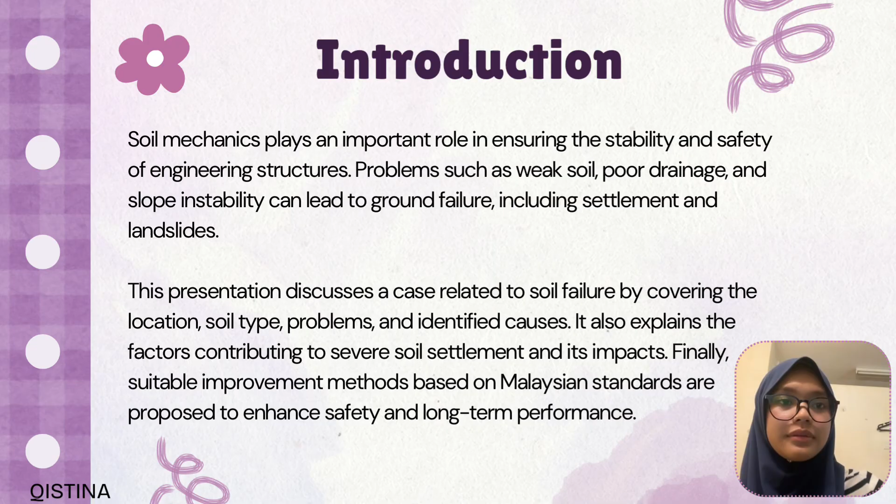Okay, so now I will explain in detail the case that we have chosen, which is the Highland Towers tragedy. About the case, this incident occurred on 11 December 1993 at Taman Hillview, Ulu Klang, Selangor. The Highland Towers consist of 12-story apartment blocks built between 1975 and 1978.

Okay, so what happened? After 10 days of continuous heavy rainfall, Block 1 suddenly collapsed at around 1:30 p.m. The collapse was caused by a major landslide which buried many residents under the debris. As a result, 48 people lost their lives and only 3 survivors were found within the first 24 hours. This tragedy became one of the most significant landslide disasters in Malaysia.

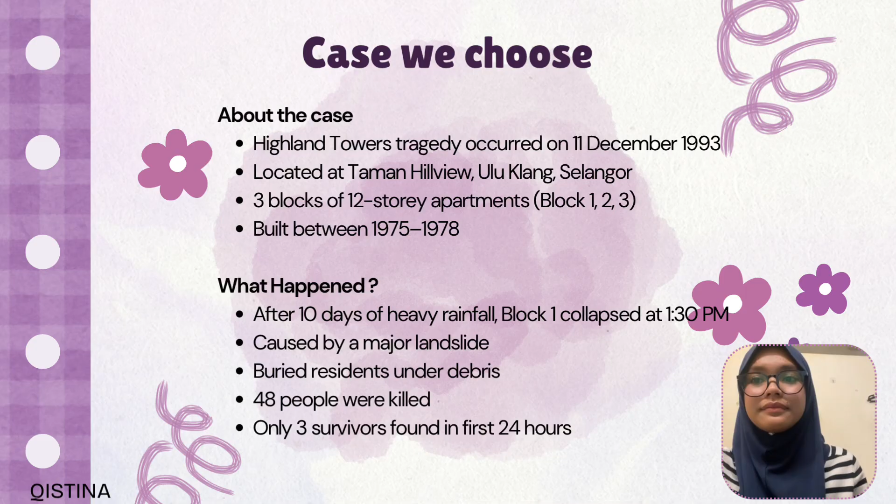This slide provides an overview of the Highland Towers tragedy, which is one of the most significant landslide-related disasters in Malaysia. Starting with the location and year, Highland Towers is situated in Ulu Klang, Selangor. The incident occurred on 11 December 1993, when one block of the apartment suddenly collapsed due to slope failure.

Next, look at the soil type in the area. The site is mainly composed of soft clay soil, which is commonly found in hilly regions. This type of soil has a high ability to retain water, especially during heavy rainfall. When the soil becomes saturated, its shear strength decreases, making it weaker and unable to support loads effectively. So, this condition leads to low stability, increasing the risk of landslide.

Now, moving on to the problems identified. The primary issue was the slope failure or landslide that occurred behind the building. This was mainly caused by excess water accumulation and poor drainage, which increased the pore water pressure in the soil. So, as a result, the soil mass began to move downhill. This movement caused a loss of structural support at the building foundation. Without proper support, the structure could no longer remain stable, leading to the collapse of Block 1.

Before the collapse, there were also warning signs such as cracks in the ground and surrounding structures, which indicated soil instability and differential movement. However, these signs were not effectively addressed in time. In conclusion, the disaster was mainly due to the combination of weak soil condition, high moisture content, poor drainage system, and slope instability, which ultimately led to the tragic collapse.

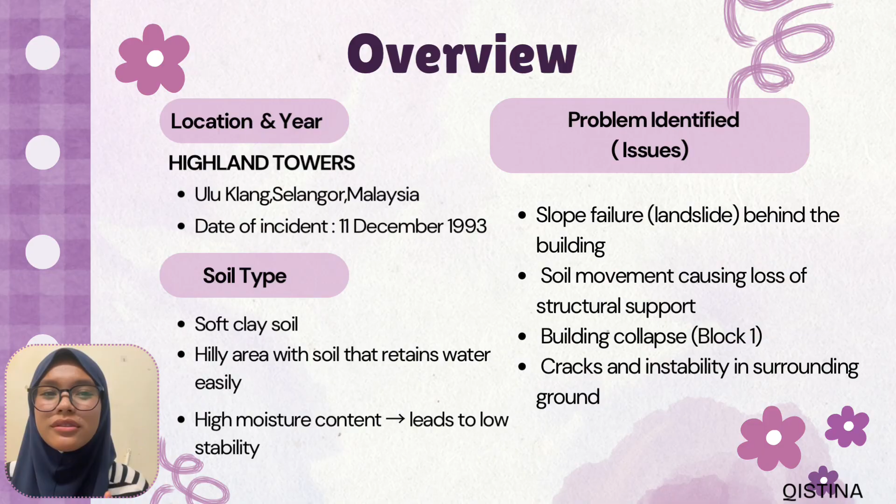Now I will explain the main issues that led to the Highland Towers tragedy. First, we have the landslide trigger. The slope became unstable, causing a mass of soil to move downhill. This indicates that the slope had reached its limit equilibrium, meaning the soil could no longer resist the forces acting on it. As a result, failure occurred and the landslide was initiated.

Next is structural collapse. Due to the ground movement caused by the landslide, the foundation of the building was compromised. When the soil beneath the structure became unstable, it could no longer support the load of the building. This led directly to the collapse of the structure.

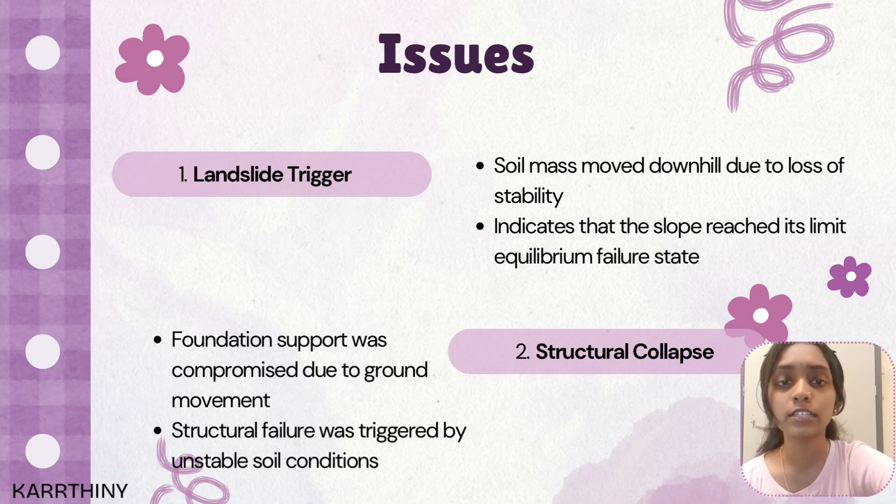Moving on to the settlement. Before and during the failure, there were signs of ground deformation. This includes differential settlement, where parts of the ground sink unevenly.

Water infiltration also weakened the soil layers, causing them to shift and further reduce stability. Finally, we have debris flow impact. After the landslide, soil, water, and debris flowed into the residential area. This caused severe destruction to nearby structures and significantly increased the hazard to the surrounding buildings and residents.

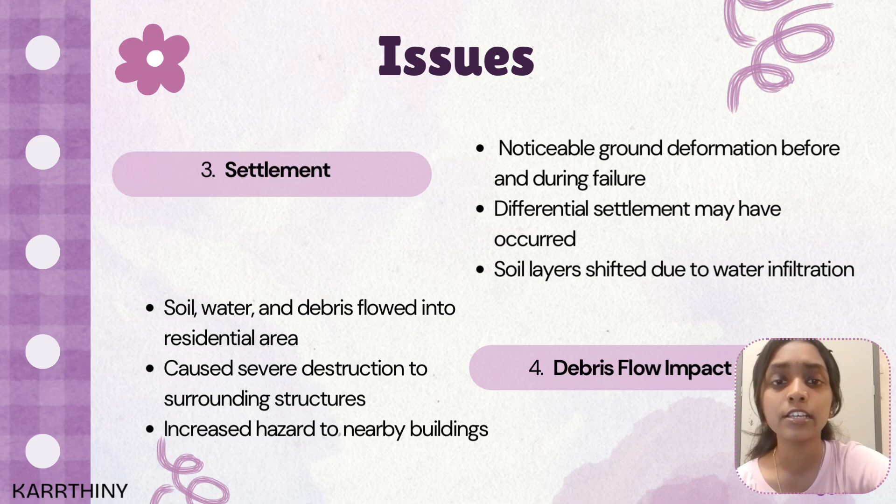In conclusion, these issues are all interconnected, starting from the slope instability leading to foundation failure and ultimately resulting in the catastrophic structural collapse. The slope failure at Highland Towers can be explained by several interacting geotechnical factors. Firstly, prolonged heavy rainfall caused the soil to become fully saturated, which increased the pore pressure and reduced the effective stress. As a result, the shear strength of the soil decreased significantly, making the slope more vulnerable to failure.

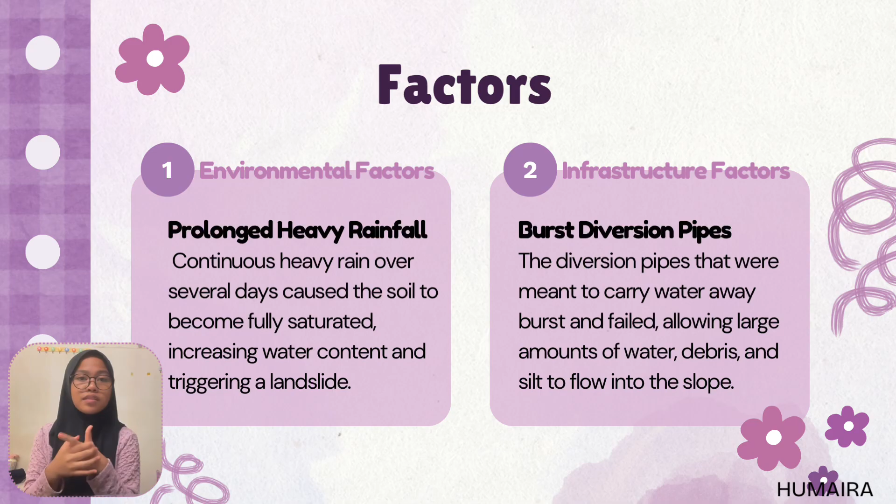The situation was further aggravated by the failure of drainage pipes. Instead of safely channeling water away, the pipes burst and allowed uncontrolled runoff, carrying debris and silt into the slope, which increased the load on the soil mass. At the same time, an inadequate drainage system prevented proper dissipation of the excess water within the ground. This led to the continuous build-up of pore water pressure, further weakening the soil structure.

Consequently, the foundation system was unable to withstand the increased lateral earth pressure exerted by the unstable soil. Overall, the combination of elevated pore water pressure, reduced shear strength, and insufficient structural resistance led to the slope failure.

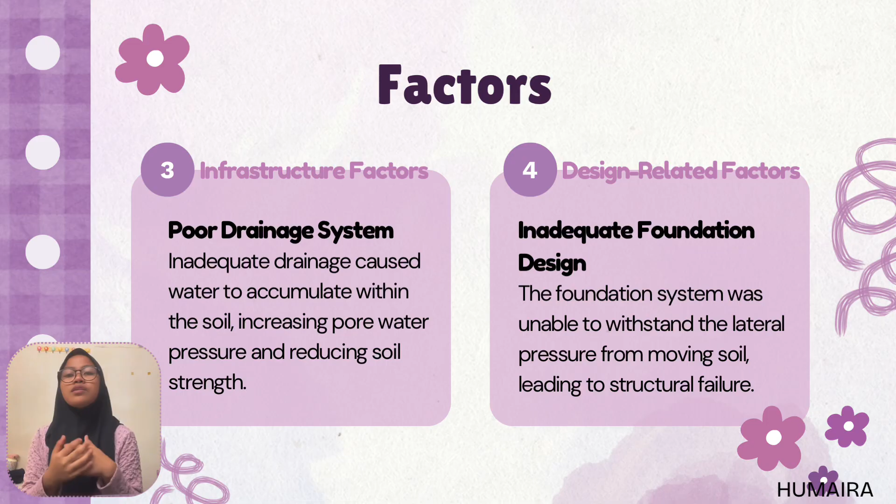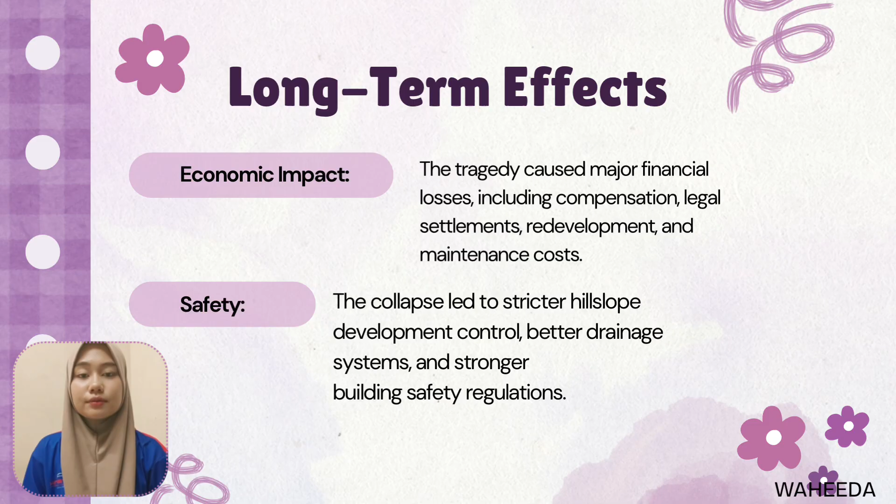Based on the analysis, the collapse happened due to drainage failure, unstable slope conditions, and weak foundation support. Poor water drainage increased pressure behind the retaining wall, while hillside development added extra soil load. These factors caused soil movement that weakened the building foundation, which finally resulted in structural collapse.

Now I will explain the recommended improvements to prevent incidents like the Highland Towers tragedy. These methods focus on increasing soil stability and reducing the risk of slope failure. For the first method, we have soil stabilization. This method involves improving the engineering properties of the soil, such as its strength and stiffness. By stabilizing the soil, we can reduce its compressibility and make it more resistant to external loads and environmental factors. As a result, the slope becomes more stable and less likely to fail, even under heavy rainfall or additional loading. This directly addresses the root cause of the landslide, which is weak and unstable soil.

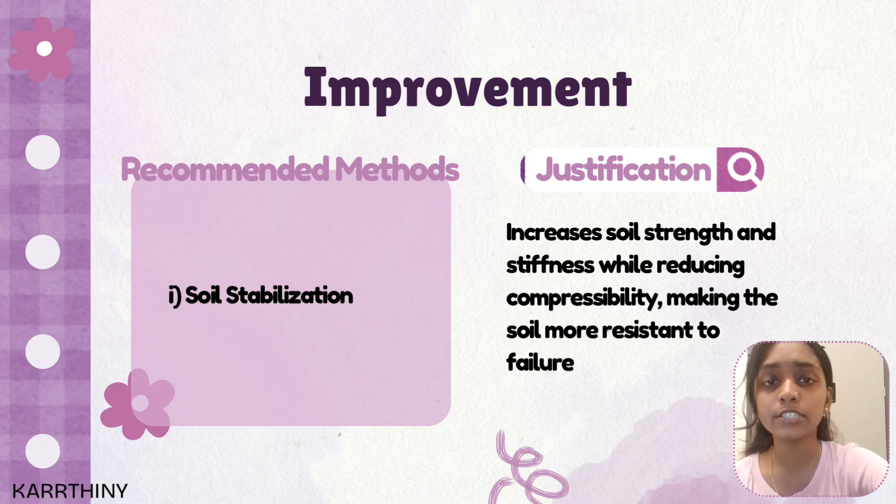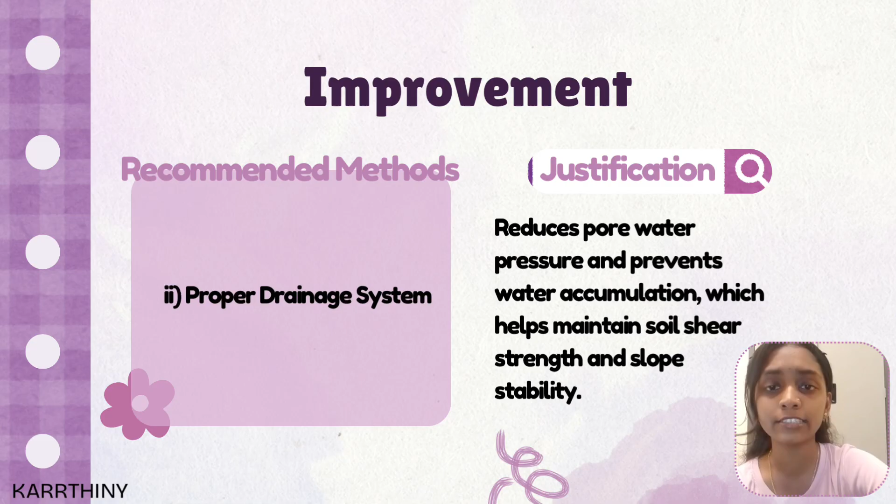The second method is implementing a proper drainage system. Water plays a major role in slope failure because it increases pore water pressure within the soil. By installing an effective drainage system, we can prevent water accumulation and allow excess water to flow away safely. This helps maintain the soil shear strength and significantly improves the slope stability. In other words, controlling water reduces the risk of landslides and protects the structure from foundation failure.

For this improvement, we propose using retaining structures. Retaining walls or reinforced earth systems are built to support the slope and prevent soil movement. This method works by resisting the pressure from the soil, which helps to reduce the risk of landslides. It is especially effective in areas with weak or unstable soil conditions. So in conclusion, retaining structures provide a safe and long-term solution for slope stability.

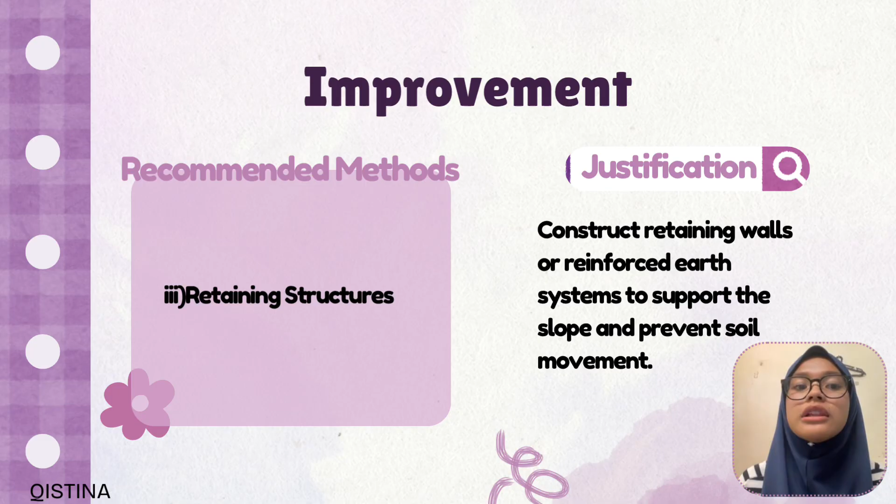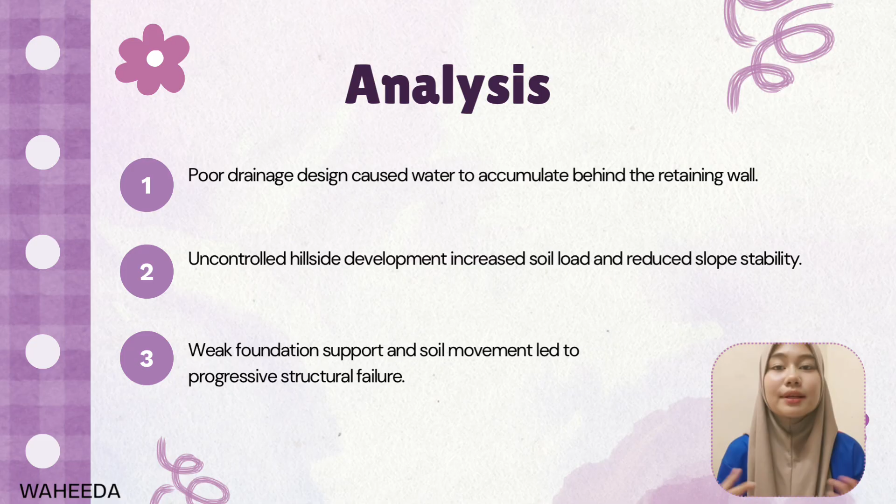For the long-term effects, this tragedy caused major economic losses due to compensation, legal settlements, redevelopment, and maintenance costs. In terms of safety, the collapse led to stricter hill slope development control, better drainage systems, and stronger building regulations in Malaysia. So, in conclusion, the Highland Towers tragedy shows how multiple engineering failures can lead to a catastrophic disaster. The combination of weak soil, poor drainage, and inadequate design caused slope failure and ultimately the building collapse.

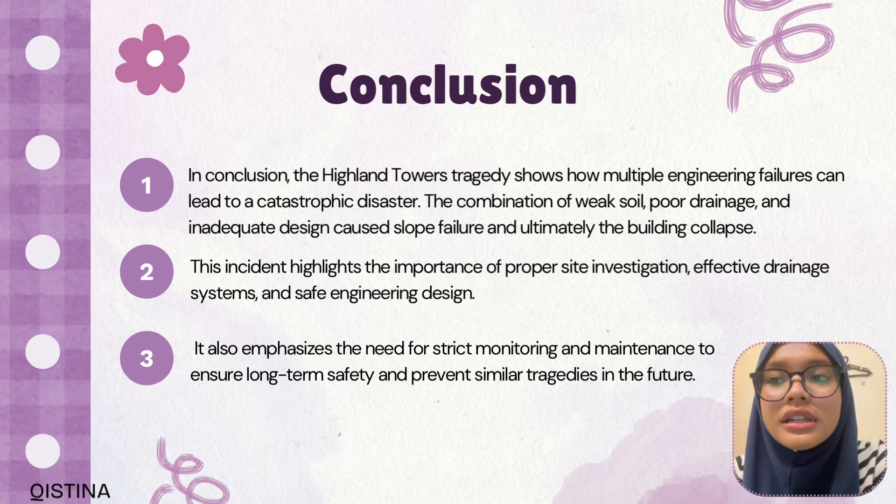This incident highlights the importance of proper site investigation, effective drainage systems, and safe engineering design. Last but not least, it also emphasized the need for strict monitoring and maintenance to ensure long-term safety and prevent similar tragedies in the future.